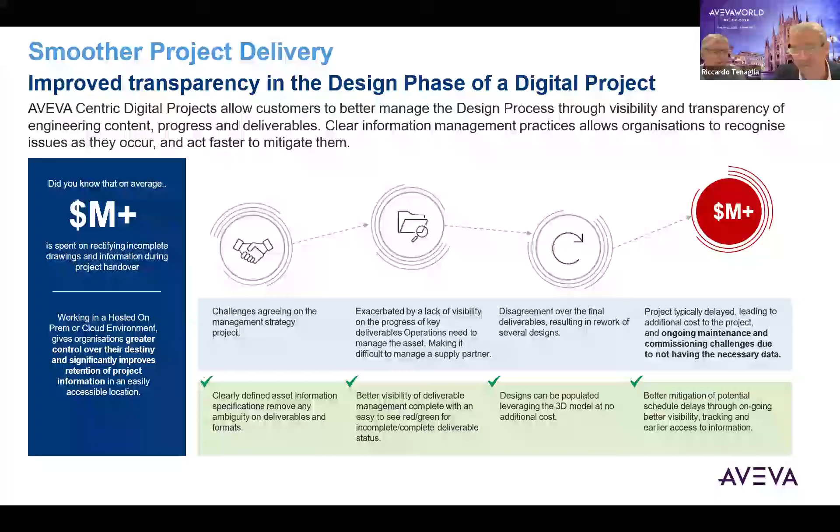Okay, so just to go through the agenda, we'll have a look first at the types of mine planning and engineering activities that we're aiming to merge into one complete picture.

We started this a little over 12 months ago, and we've completed phase 1, where we've actually merged the Deswik MDM model with AVEVA E3D, and I'll show you some of that shortly. We're currently working on phase 2, which is to return some of that data from E3D back to Deswik, in particular for tag management. I'll show you some of that towards the end of the presentation.

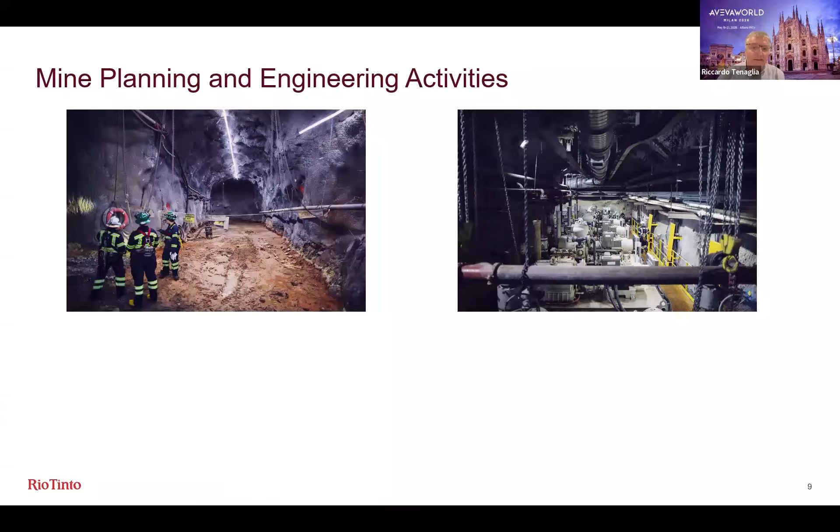So if you look on the left-hand side, these are the mine planning activities, which generally get done in Deswik. All the mine planning and geotechnical teams plan all the mining activities together with lots of the geotech data, like fault planes, the boreholes and that kind of thing. And they generally engage mining contractors to actually do the mining, blasting and excavation works.

And on the right-hand side, you can see this is actually part of the dewatering infrastructure in a mine. So the engineering teams perform all the engineering activities for this underground infrastructure, and again they engage engineering service providers to perform the detailed design and engineering up to construction.

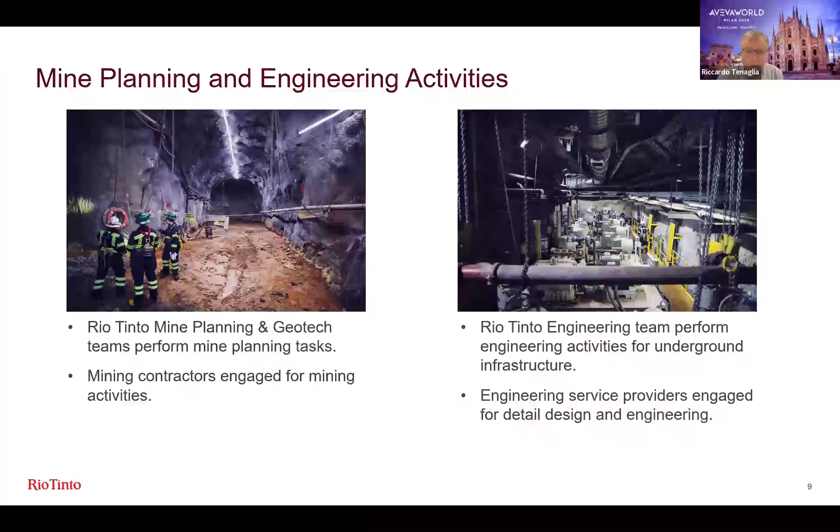So if we just have a look what some of these applications look like when you're using them. So Deswik MDM is what you're looking at here, and you can see this is a complete underground design of a mine. In the center, you can see there's a 3D model, but it's not just the spatial data in 3D that we're looking at.

On the left-hand side, you can see we've got a whole database complete with different data sets. And on the right-hand side, we've got sets of properties. So when you click on an object in the 3D model, you can see which data sets it belongs to and a list of all the properties in the database. And this in general is mine planning data.

So a couple of things to note. In the 3D modeling part of the screen there, most of the underground design involves irregular shaped solids. A lot of the surveyed solids are watertight triangulated surface meshes, completed after doing basically LiDAR scans underground, using a process to triangulate the point cloud data into a surface mesh. A lot of this data is derived from sensing and measuring of real world conditions, with some direct input as well.

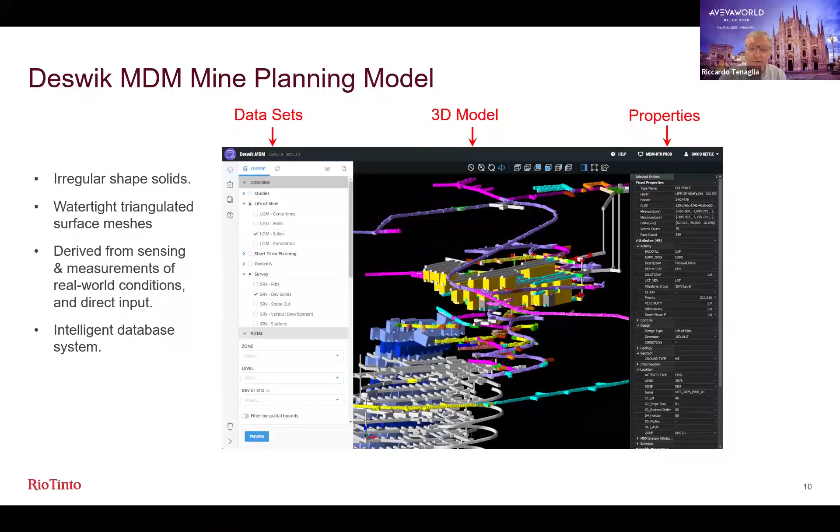And just to reinforce, this is all based on an intelligent database system. So it's not just the 3D solids you're looking at, it's all the data which is associated with those 3D solids as well.

And in a similar vein, AVEVA E3D is used for 3D layout, design and modeling of the underground infrastructure. Again, we've got the 3D model in the center of the screen there. We've also got a database view, because all the 3D solids are linked to database objects, and the database objects have all the physical, geometric and material properties which you need for design and construction.

Most of the solids which you see in the 3D view are regular shaped solids, and they're generally defined with parametric definitions. So you can use formula and parametric data to describe the shapes which you're seeing in the 3D view. And most of that data is derived from industry standards, catalogues, and again, direct input by the designers and engineers.

And again, just to reinforce, AVEVA E3D is also an intelligent database driven system.

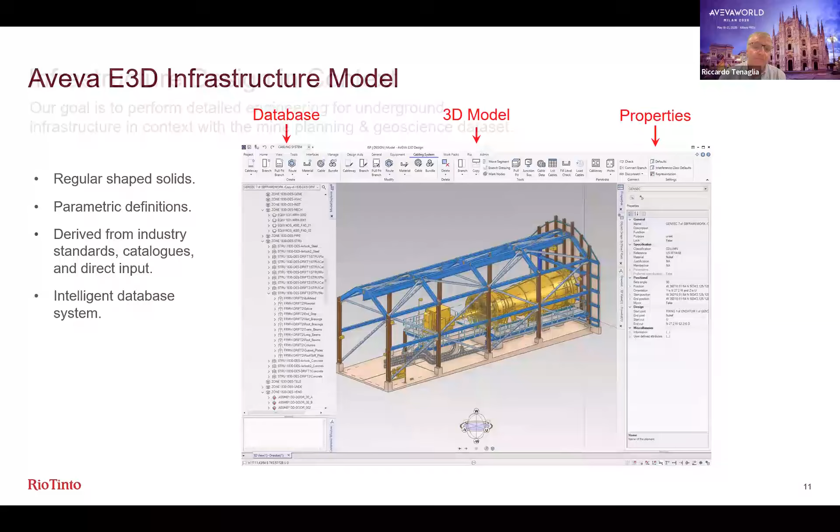So what we need to do is, because both systems have slightly different sorts of data, the software which is developed over years is optimized for the particular sorts of data sets which you're viewing, particularly in the 3D side of things. So we look at the right-hand side here. This is Rio Tinto's implementation of the AVEVA Unified Engineering toolset.

Today, we're particularly talking about AVEVA E3D, which is the 3D modeling for the infrastructure. But we're also connected to AVEVA Engineering for tag management and the class library. And we also have 2D data for AVEVA diagrams, electrical and instrumentation schematics.

And all this data sits within the Dabacon database. And we use a system called Compare Update to make sure that all the data within the AVEVA tool set is synchronized. The complete set of data there is hosted in Azure, what they call virtual desktops. So we can roll out virtual desktops to anyone working on particular projects, and they already have all of this software and all the different database tools installed.

Just a note on Navisworks. We use Navisworks or BIM 360 on a lot of projects for 3D model reviews. Navisworks is quite good at merging 3D model formats from lots of different systems, but it is just a model review tool. So you can't create new models in Navisworks, and you can't generate any deliverables from Navisworks.

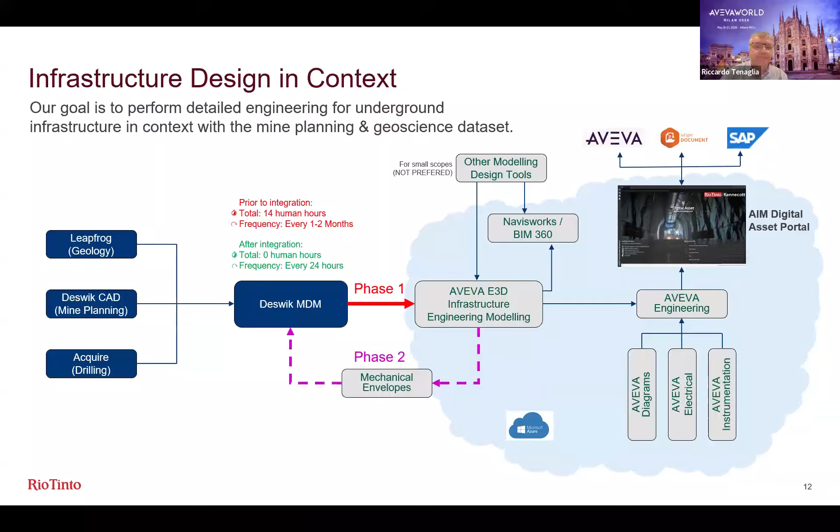So we'll talk about phase one, which is about passing the mine planning model from Deswik MDM into E3D. I've got a video just to show you, which is a fly-through of the Kennecott mine in Utah, in the US. A couple of things to note before we start.

It's only about 40 seconds long, but you can see there's purple translucent objects in the middle of the screen there. They're the fault planes taken out of Deswik MDM. And then as we zoom in closer, you'll notice some light sandy brown objects, which are the design model in Deswik MDM for the mine planning model. And the dark brown objects are the surveyed and triangulated surface meshes from the surveyed data. So if I just start that now.

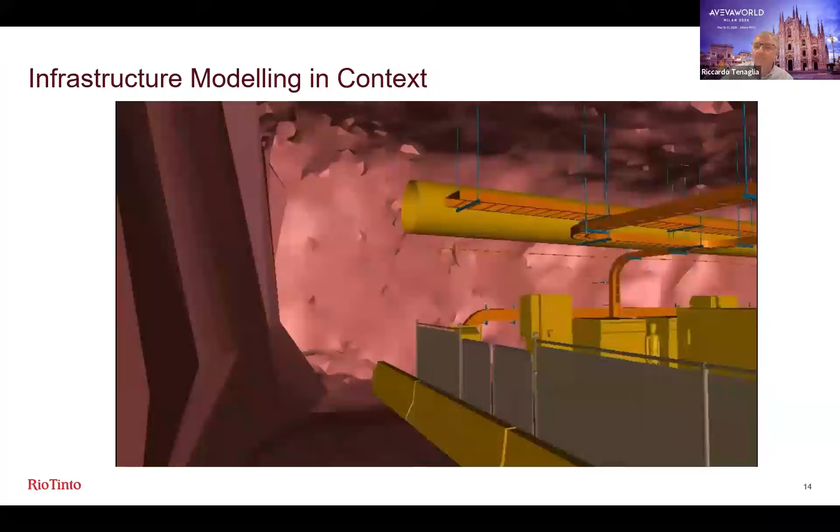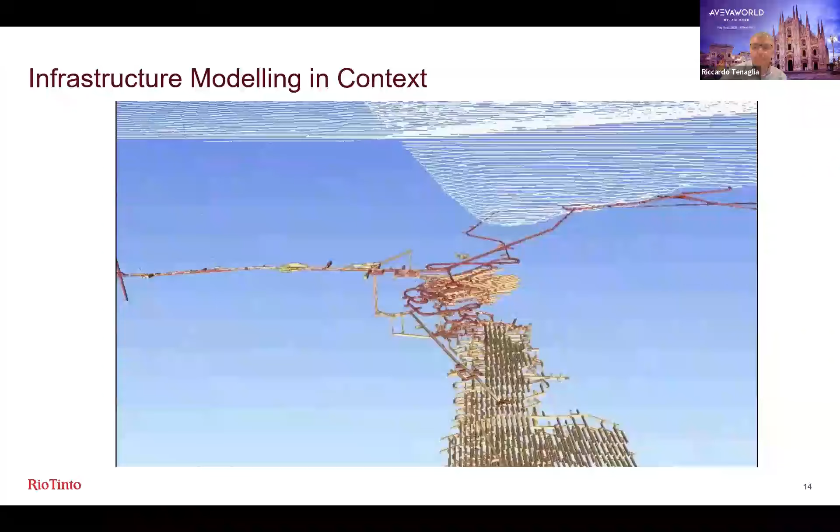Look at the scale. Wow. Okay, so I hope you can see from that brief fly through, it's really quite a large scale in 3D spatial scale. And we do have quite a large data set from Deswik MDM in the model there.

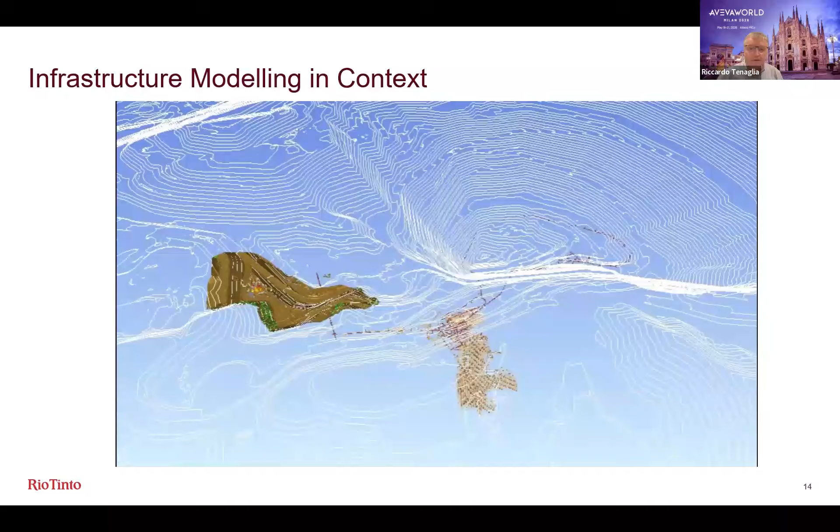And the infrastructure we flew through was part of the dewatering infrastructure and electrical supply system. So that should give you an idea of the scale of the underground model in Deswik MDM.

So when we talk about copying the 3D model data from Deswik MDM into AVEVA E3D, the first thing we have to overcome is that both systems use proprietary 3D model and data formats in the database. There is no cut and paste. Like you cut and paste between Microsoft Word and PowerPoint or Excel, you can't do that with these 3D intelligent modeling systems because they're different proprietary formats.

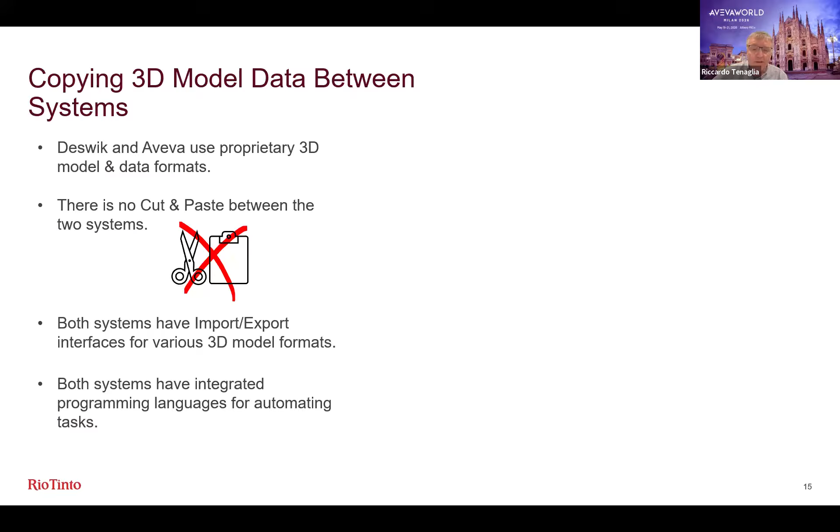But both systems do have import interfaces for various different 3D model formats, and they also both have integrated programming languages which enable you to automate tasks. On the right-hand side there, you can see for AVEVA E3D, the multi-CAD import interface. There's about 24 different formats we can import from other systems into AVEVA E3D. Some formats are more successful than others, and some formats do have an impact on 3D performance in AVEVA E3D. So we did do some work to find out the best formats to give the best results.

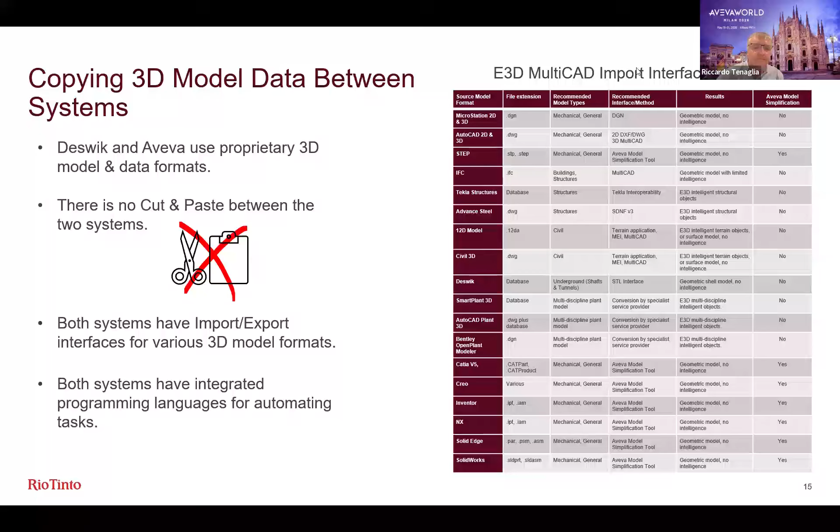Just before we look at the formats in more detail, on the left-hand side, I've just highlighted the Deswik MDM datasets for the underground mine planning model. On the interface, we have different datasets which we import into E3D at different rates. So for the design model in Deswik MDM, for the short-term planning and life of mine models, they're relatively simple 3D geometry because they're the design drifts, which are basically the cross-section of the tunnel shape.

And the survey models, they're the complex 3D triangulations from the point clouds. We replace all of these in E3D every day. So every 24 hours, we update the complete model. We don't actually need to update the complete model. We look at what's changed in Deswik MDM, and then we only update the objects in MDM which have changed since the day before.

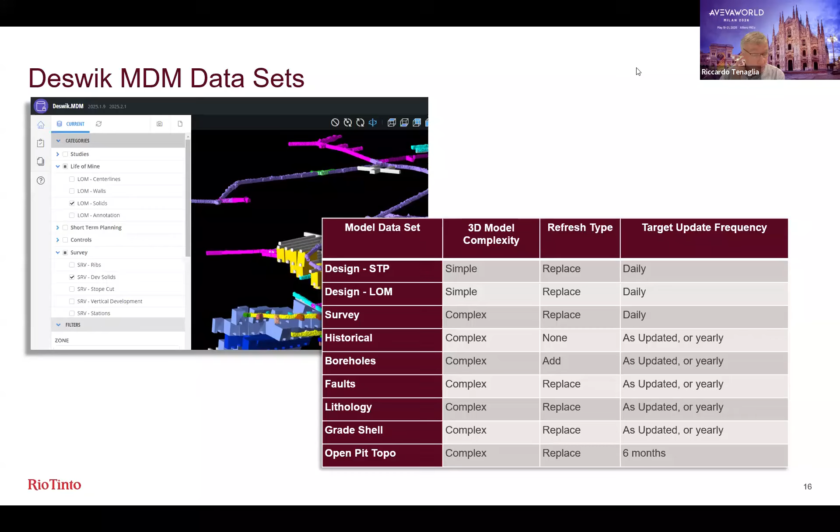So we do keep a link between the E3D solids and the Deswik MDM solids, so we can always trace them back between the two systems. Some other data sets we update as and when we need to. We have some historical mine data, as I said, borehole data, faults, lithology, grade shells, and the open pit topography. So we update them as and when we need to.

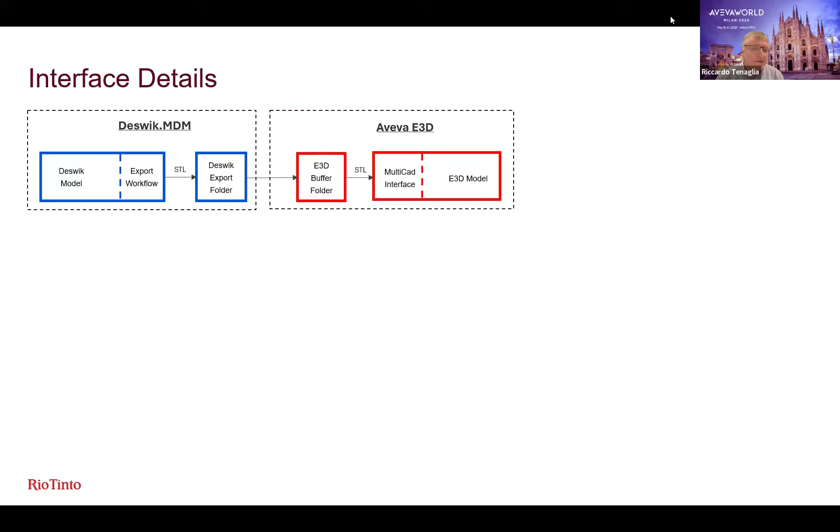So the interface details between the two systems, as I said, both systems have the ability to translate data between different model formats, but they're generally generic interfaces, which just deal purely with the geometry. So in the implementation we did for the Rio Tinto work, we make sure that Deswik MDM remains the master model for mine planning and geotech data. So we don't edit the model in AVEVA E3D at all, and that's crucial to keep both the models synchronized.

We have a logical break between Deswik and E3D environments, and this is because there's a different team that manages the databases and the servers for both Deswik and AVEVA E3D. So we've designed the system so that if there's downtime on one system, it doesn't affect the other system.

And we do provide configuration files so that we can change the data sets. We can add or remove data sets and change some other parameters. So for different projects, you can have a different configuration with different data sets.

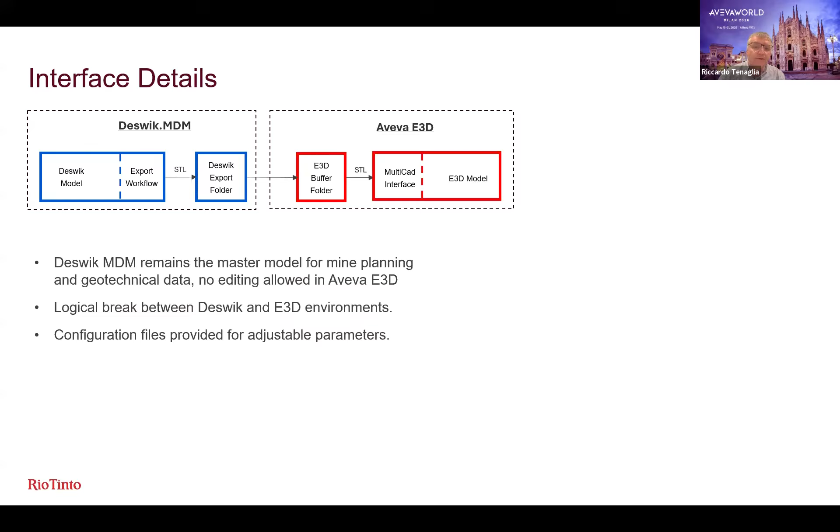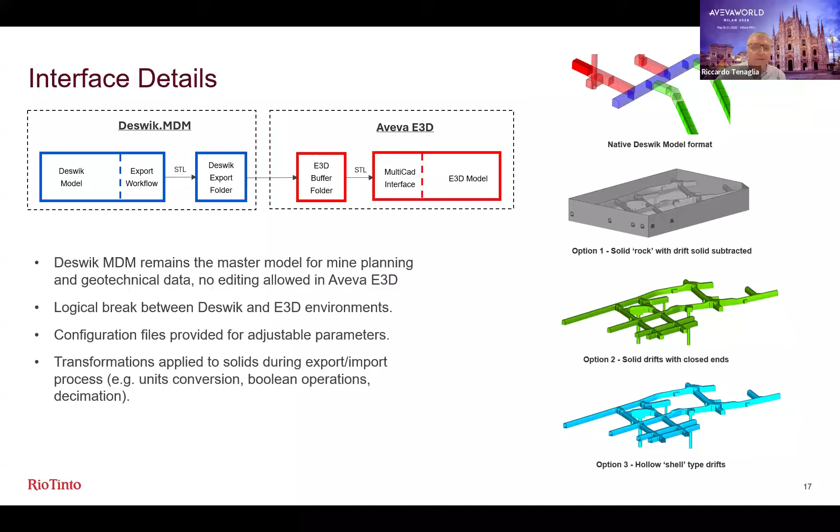So if we look at phase 2, this is where we need to pass mechanical envelopes from E3D back into Deswik. This develops the initial idea of making the E3D modeling activities more efficient, because we can do it in the context of the Deswik 3D underground model as well.

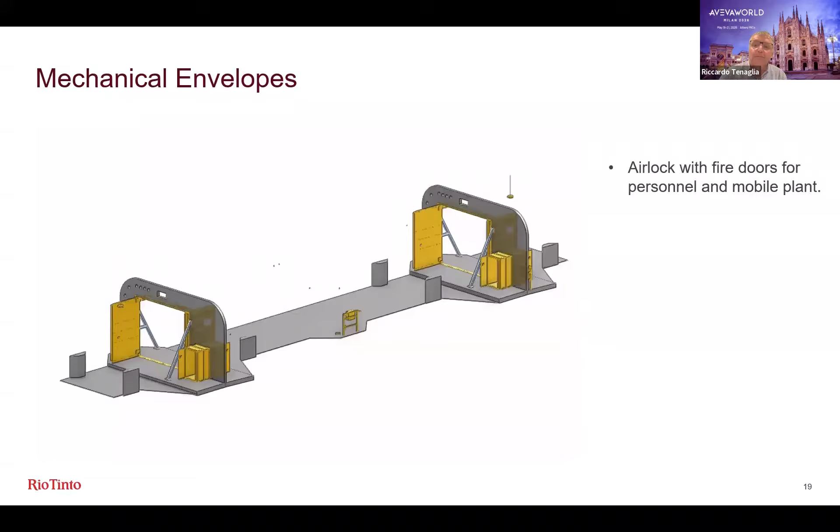But when you look at the actual infrastructure modeling within E3D, sometimes you can see there a straight drift, which has come directly from the Deswik design model.

It's not wide enough. It doesn't contain the whole airlock structures and some of the electrical gear. So what we do in E3D is when we lay out and design the infrastructure, we can put the smallest possible mechanical envelope around that structure, which means we can reduce the size of the excavation, and that saves obviously time and effort and schedule.

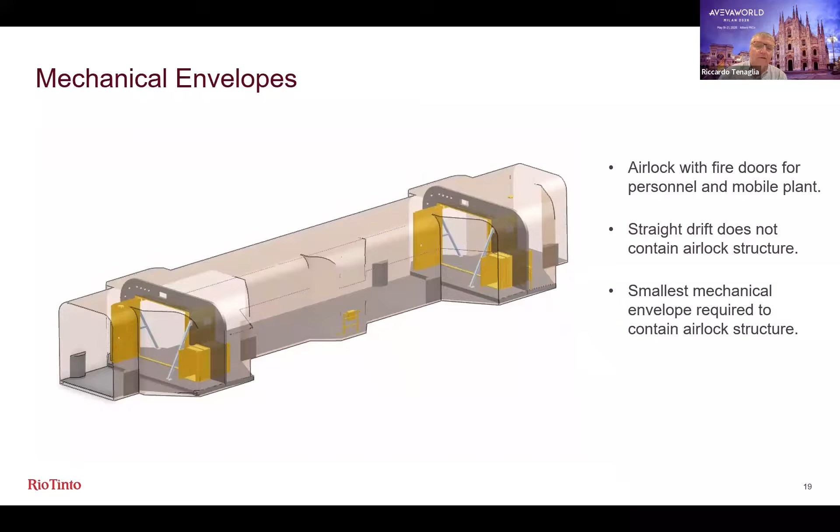But we need to get the mechanical envelope back into the Deswik MDM model. So the next phase, you can imagine, once we've passed the mechanical envelope back into Deswik MDM, they need to do the excavations and then scan the excavations to make sure that it is big enough to fit the mechanical envelope within the actual excavated drift.

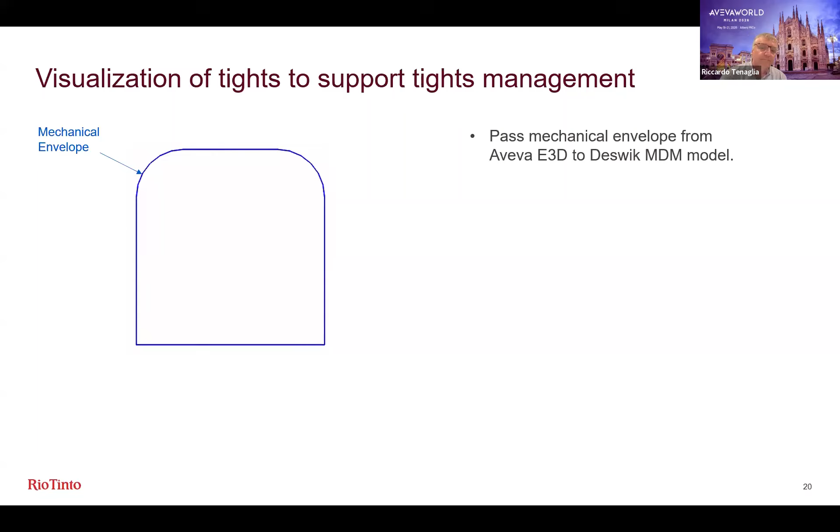So after we've passed the mechanical envelope to Deswik, they do the excavation and then they scan the survey drift, and then we can compare the mechanical envelope with the survey drift.

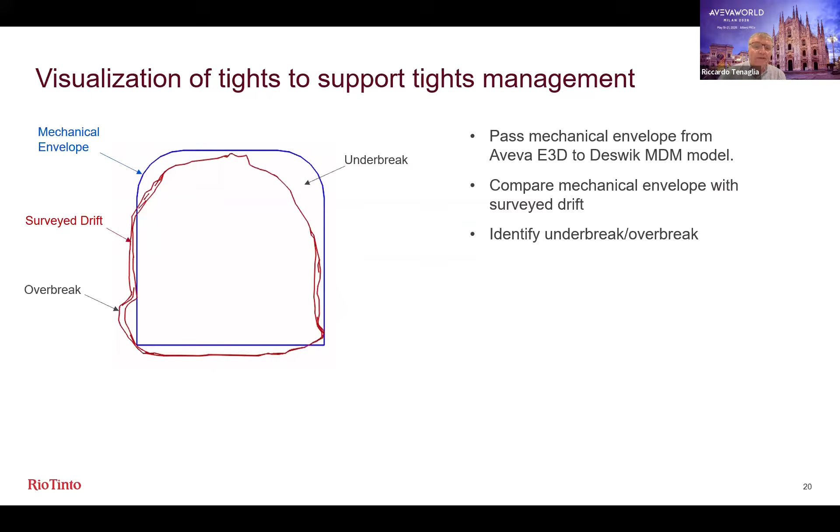And a couple of terms there. Overbreak is where the excavation is bigger than it needs to be, and underbreak is where the excavation isn't large enough. So if we need to fit some of the mechanical infrastructure in the space of the underbreak, you can see at the moment the excavation isn't big enough. So we need to identify those as quickly as possible.

And the other term I've used there is tights, and tights is where it's a tight fit, which means the surveyed drift is basically not big enough to fit the infrastructure in.

Now, if you leave the comparison of the mechanical envelope and the survey drifts until after all this work is done, it becomes a very expensive and time-consuming exercise if you need to do a bit more excavation, particularly where the underbreaks are. So what we're trying to achieve with phase 2 is we get the surveyed model data and the mechanical envelope data into the Deswik MDM software as quickly as possible, and that will reduce the risk of any impact on the schedule and cost when they're completing the excavations.

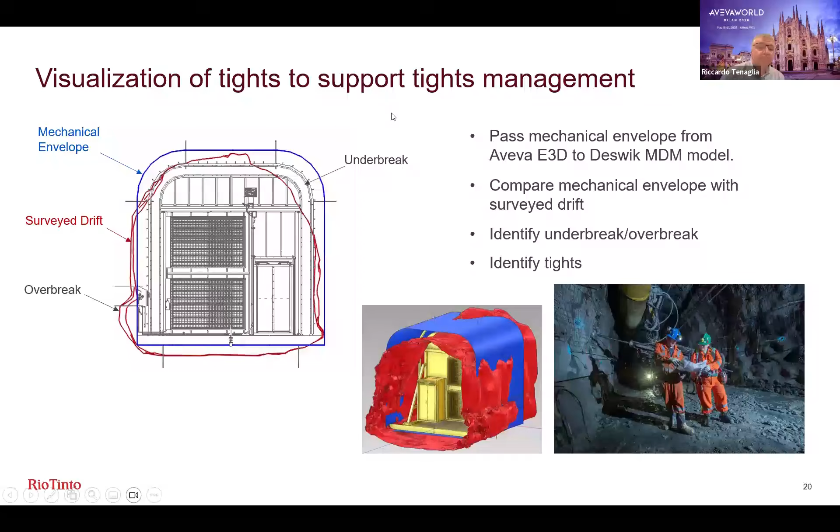Okay, so we just look at the current status. Phase 1 is complete, and we've been using that on the Kennecott project for about 12 months. So we're already seeing the benefits of this in the workflow at Kennecott.

Phase 2 is currently in development for the Kennecott project. So we're working with Rio Tinto, Deswik and AVEVA again to complete the phase 2 side of things. And there's a possibility we may use the same development for resolution and Simandou projects as well, but that's not been decided yet. So I think that's as far as I wanted to go.

Yeah, perfect. Yeah, do you need to say anything about that?

Yeah, I guess some of the questions that when we were originally talking, and I saw the early stage design of the mine, and probably for those that were looking at the fly through that we had, it's a very different mine in that there's a lot more use of electric vehicles underground.

And as soon as you start putting electric vehicles underground, you have issues with having to put the infrastructure associated with the charging stations. You also have a whole lot of dewatering equipment in massive caverns underground. And it seems to me that it is very different to how you would have developed a mine in sort of years gone by. Is there any sort of anything you wanted to go into a little bit more detail around, you know, some of the amount of infrastructure that's going underground and why this is important?